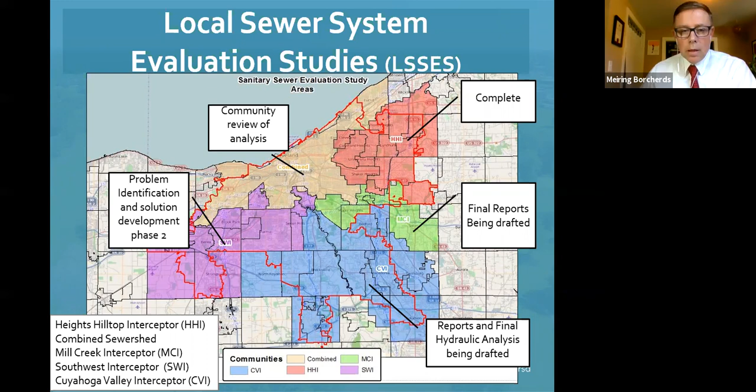Update for you on the 2021 fiscal year Member Community Infrastructure Program. Our funding was reduced, unfortunately, due to a loss of between $40 and $50 million in revenue during 2020 due to the pandemic. And as mentioned by Mr. Greenland, unfortunately, we had to reduce the amount of projects that we had. We had some great applications from all of you for the 2021 MCIP fiscal year. But unfortunately, we only had 2.5 million available to us. We selected 7 projects out of all the projects that we received to be funded for 2021. 3 of them were design and construction projects, and 4 of them were design-only projects. Next.

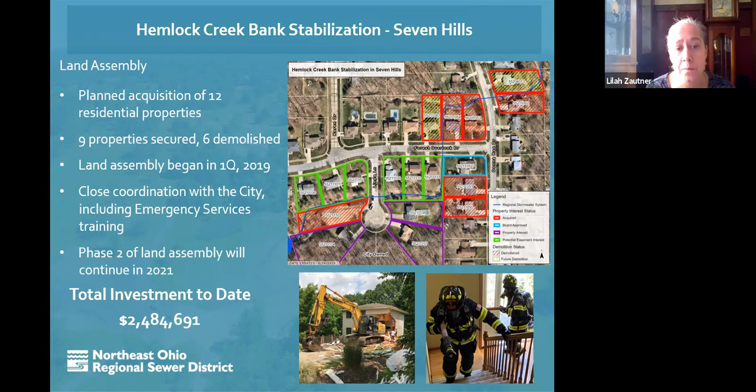With these acquisitions complete, we are now done with phase 1 of our assembly. We're now planning to begin design on phase 1, and while that moves forward, we will then start phase 2 of the land acquisition. The total investment to date in this Seven Hills project area is $2.4 million. And when we are finished, give or take, we'll probably be around $3.1 million. Thank you, John.

Next, I'll go ahead and introduce my colleague, Paul Kovalcik. Thanks, Lilah. Thanks, John. Oh, we could stay on the first slide, but we can go to this one. That's fine.

In the past, we've often used stormwater funds to help leverage state and federal grant money for projects that benefit the regional stormwater system. Specifically, we've made it a practice to provide match funding for grant projects. This includes, but is not limited to, 319, Sustain Our Great Lakes funding, Clean Ohio funding, coastal management grants, and the like. For 2021 and beyond, we've decided to formalize the process for distributing matching money for grants. So we've designated $500,000 in matching stormwater funds available for grant funded projects in 2021.

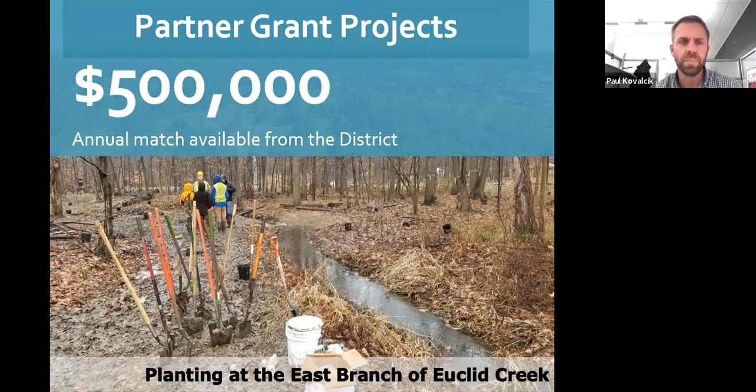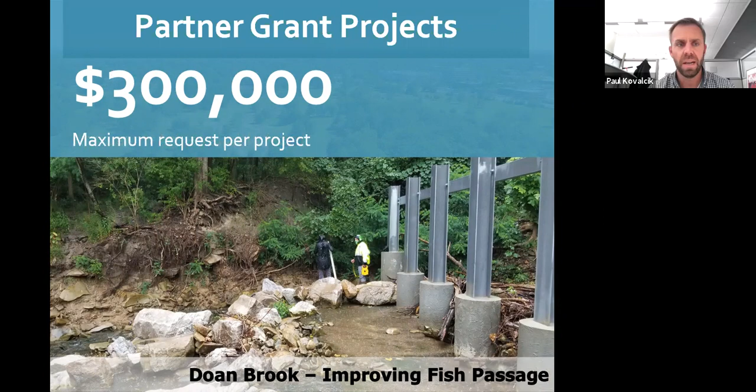Next slide, please. If you are requesting match funding from the district, we'd like people to limit their request to $300,000 per project. Next slide. The application process is relatively simple. We'd like to see a good project summary with anticipated outcomes, a cost estimate with some line items and unit costs with the total cost, a concept graphic showing the work area, hopefully along the regional stormwater system, and the dollar amount you're requesting from the district.

You can use the project summary sheet from an existing 9-element plan for non-point source implementation strategies as a template if you wish, if you have one. We'd like to see a little more detail if this is for 319 funding. And this is actually required if you're going after 319 funding. And then email it to me. Next slide. Email it to me by the end of 2020 is what we'd like to see from you. And our goal is to review these and let you know of our decision by mid-February 2021.

Next slide, please. I'll read this one. We'll nominate each application to our stormwater construction plan and rank them in our normal ranking system. And of course, the funding would be distributed according to rank.

We can be available to assist with developing concepts, sediment and nutrient budget estimates, costs, and other things for general technical support. But this does not give you any more chance of being awarded, I should say, or does not guarantee an award from the district. We can provide in-kind services even if the district funds are not awarded for the grant.

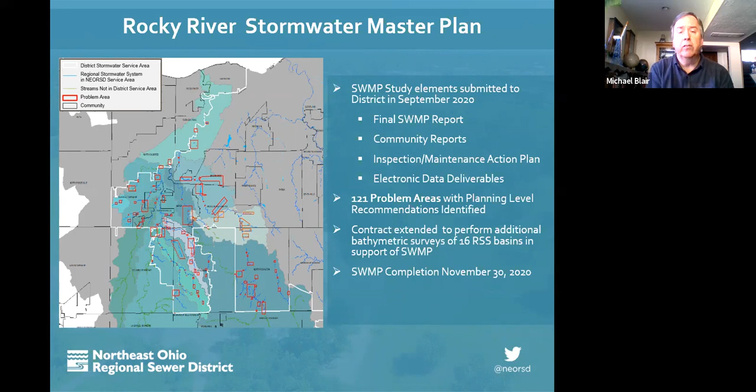If we go to the next slide, please. And what I wanted to briefly show you is the distribution in one way of the problem areas that we've seen, and problem areas as opposed to standalone projects.

Problem areas are where we have a great number of building, transportation, utility assets that are impacted by either flooding, erosion or water quality problems, as opposed to standalone projects where you may essentially just have one BTU that's affected. So we kind of broke it up into that area.

Unfortunately, this is not essentially all the work that we're going to take on alone. We are going to be working with our community members to try and whittle this down because we cannot do all this on our own, so to speak. If we go to the next slide.

So now that we've gotten all the project areas identified, we have preferred alternatives identified for each one of those as well. What we're doing right now is taking those stormwater master plan recommendations along with other projects that have been identified by either a member community or a watershed group, and right now we're going through the nomination process. So we've actually taken all the Rocky River problem areas and standalone project areas, and those recommended solutions are going through the nomination process right now. We're currently working on validating those.

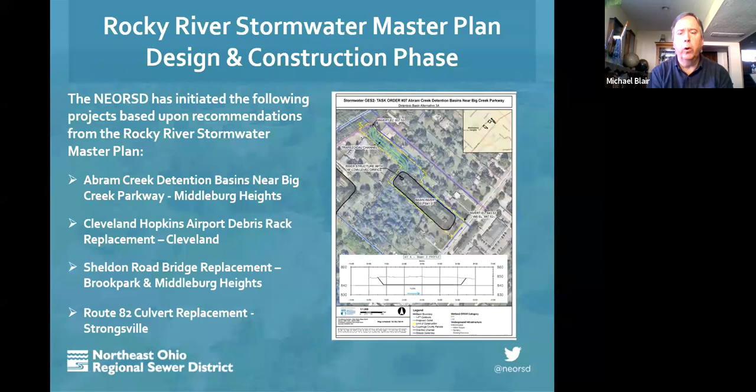Finally, we are working with the city of Strongsville. They're taking the lead on replacing the culvert underneath Route 82, or Royalton Road. That's in design at this point. If we can go to the next slide, please.

Now, as we go through the nomination process, some of these projects, when we take a look at them, might need some additional advanced planning. So this year we did award an advanced planning contract to an outside firm.

And basically this planning is to help support the implementation of the construction plan, with the goal of getting some of these really large projects ready for full design. So the projects that we might be talking about here are projects that we've identified in the master plan that have some very complex components. That could be a larger number of either property acquisitions or easements we might need to get for particular projects. The project might be located in an area where we have a lot of different stakeholders.

Let's say, for example, we have stakeholders like the city of Middleburg Heights and also the Cleveland Metro Parks. So we have multiple communities and then the Metro Parks. And this is just coordinating how we would work with the community groups, see and talk to them about what their stakeholder plans are for the area, so that we make sure that we do this in cooperation with those groups to see that this is a successful design and construction project.

There are also going to be certain projects that are just going to be cost prohibitive without doing phasing. I'm going to show you one in Parma where we have this particular issue. And then there are going to be some that just require some additional information to understand the full impact of this project on the regional stormwater system.

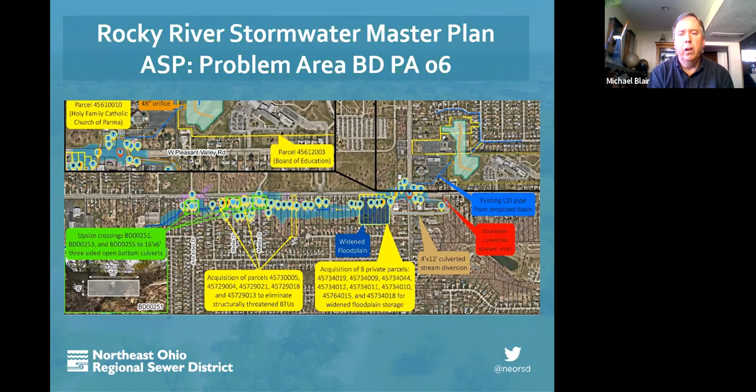Our objective is to accept the recommended alternative for this particular problem area. We want to confirm that the properties we've identified for either easements or acquisitions, for the widening of the floodplain or for the installation of that basin, are actually going to be available and usable for that purpose. We'll also review and consider the level of service goals to see how we can maximize the benefits versus the cost of this overall recommendation.

Specifically, we want to try to break down this overall preferred alternative into manageable projects that we can then take through the prioritization process and get through to design and construction.

I've mentioned early on that we received all the study materials from the consultant for the Stormwater Master Plan for the Rocky River. A lot of this information is available to you as community members. For example, most of you have access to our GIS system, and as part of that, if you click on the reference polygons, you can pull up all the CCTV video and PACP reports for the culverted stream sections within the Rocky River Watershed.

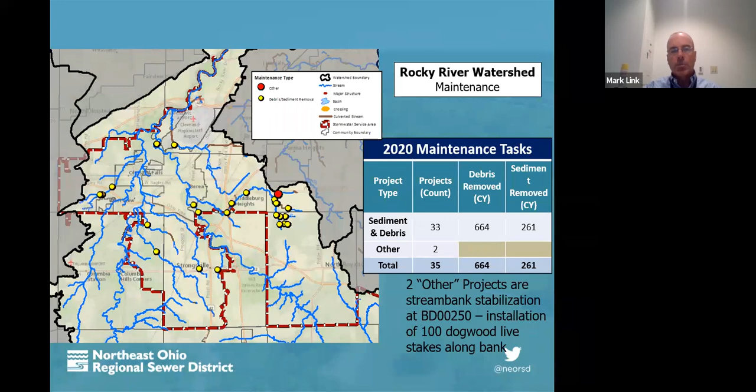So far in 2020, we've performed 33 sediment and debris removal tasks within the Rocky River, removing approximately 664 cubic yards of woody debris and approximately 261 cubic yards of sediment. We also performed 2 other projects focused on minor repairs to a bank stabilization project we had done. We compared our 2019 maintenance tasks with our 2020 tasks across the service area, and found that we completed more tasks in 2020, but the removal of debris and sediment was actually less.

I'll touch on one of our small scale maintenance projects. This was a problem we identified on Echo Lake Basin in Strongsville. We started noticing a large sinkhole forming due to some section loss on the concrete apron wing wall. The project entailed repairing that section loss with a concrete blocker. We backfilled that sinkhole, and lowered the basin water level to relieve pressure on that impounding structure — this dam is pretty old and in pretty bad shape. The basin dewatering followed some stormwater master plan recommendations, as this basin was determined to provide little to no detention or water quality benefits based on their model.

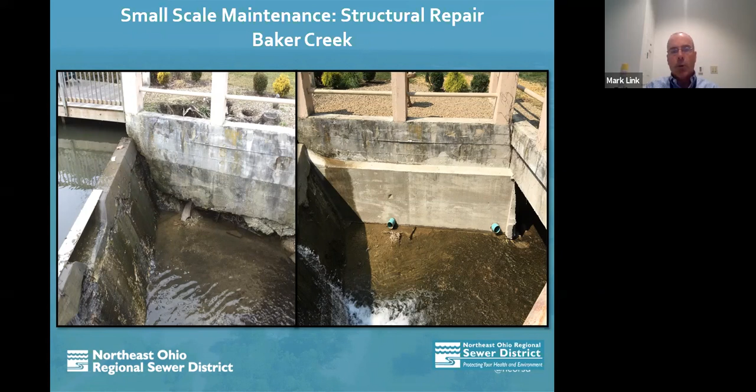So I'll move into our culverted stream inspections. In 2020, we began to increase our focus on these culverted streams, using data sent to us from the stormwater master plan teams. Our approach has been to review all the CCTV videos and the PACP reports, and then follow up with our own inspections of the most critical issues identified by the stormwater master plan teams.

Service area wide, we've completed about 68 out of the 113 culverted streams that needed follow-ups. Within Rocky River, our inspection teams have completed 6 of the 23 assets that needed follow-up. We'll continue to monitor these identified problems and make recommendations for any necessary repairs.

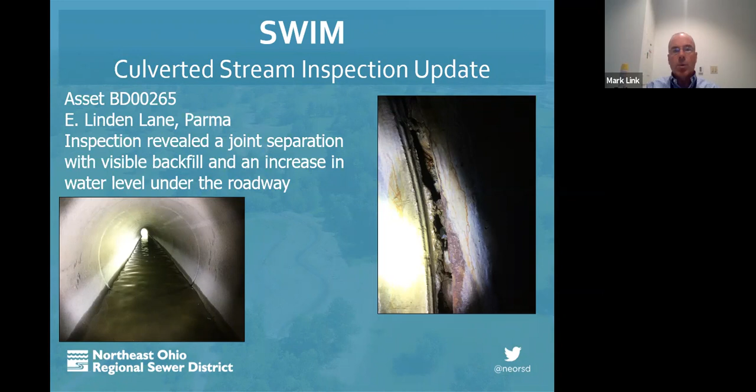So an example of one we re-inspected under East Linden Lane in Parma. We identified some joint separation and some visible backfill within the pipe itself.

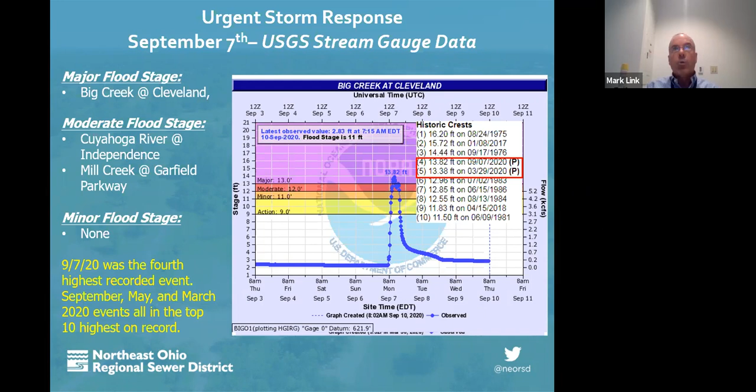This slide shows the results of our stream gauges that we monitor. As you can see, the Labor Day event was the 4th highest recorded for Big Creek — in 2020 we actually had 3 events on Big Creek that were in the top 10. One thing to note is that the Cleveland Metroparks Zoo will start to flood when the stage reaches 12 feet, and we did follow up with the zoo, and they confirmed they flooded during this event.

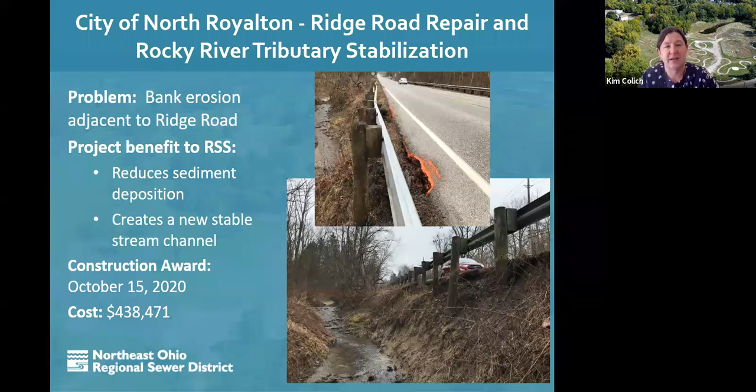So we're not just moving the channel, but we're incorporating natural features in this stream channel by incorporating the use of logs and woody debris along some of the outside banks, as well as opening up that floodplain to allow that water to slow down, to reduce the erosion potential, and just have a better functioning stream in this area. So we're really excited to get this project underway.

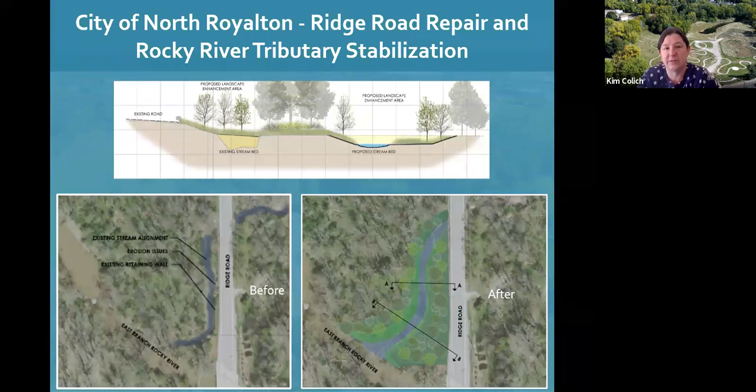Another project that's going through design right now in the city of Broadview Heights is our Chippewa Creek project near Broadview Road. This is one of those projects kind of like that Pepper Luce Creek one where we have an open section of channel that has some issues going on. The erosion, there's an undersized culvert on the upstream end of this. There are gabion baskets that are starting to come apart on one of the stream banks. We have a sanitary sewer that's close to being exposed, again, because of that erosion along this stream stretch. So those are the things we're going to be looking at, including expanding the floodplain as well.

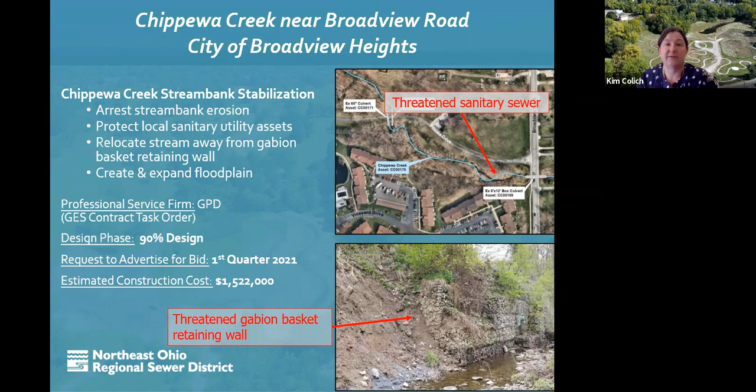Another design that's under our GES contract, getting near 90% design for this project, and we're hoping to bid this one out the first quarter of next year. Again, those opportunities for those open sections of stream to really establish a more natural stream function and health, reduce the risks to nearby infrastructure and assets, and create that floodplain to slow down the flows.

And then here's an example of a project that really did come out of our master plans. This one was the Cuyahoga River North Master Plan, but it's true of any of the master plan recommendations for areas that have a lot of flooding. So this is in a section of Big Creek in the city of Parma. We are starting a GES design task order to look at optimization of this existing upper Ridgewood Basin within the Big Creek watershed. And really, like I said, this recommendation is coming from our master plan.

We're really looking at how do we optimize the storage here to reduce flood risk downstream. It's a city-owned parcel. It's an existing basin, so it gives us a great opportunity to see how we can modify that basin to give us the best bang for our buck from a flood storage perspective. So we're just finishing negotiation on the scope and fee on this project. It says 2021, but we should be starting potentially next month on the design for this basin modification.

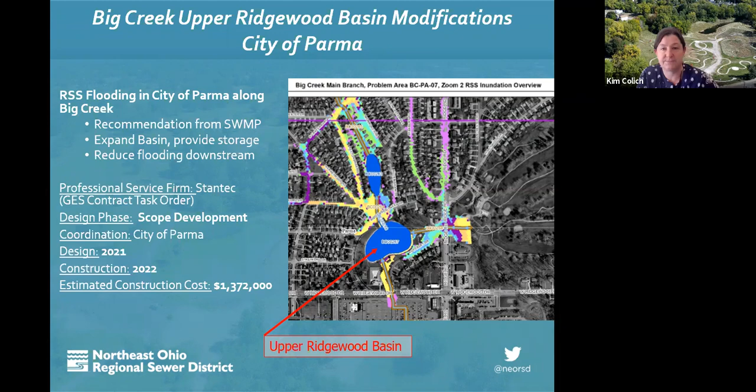And then moving over to construction, this is the West Creek Bank Stabilization by Sandpiper Drive in the city of Parma. We talk a lot about opening up floodplain and reestablishing natural features of these streams, but sometimes it's just not possible in a lot of these highly urbanized areas. So in this case, we had to harden this bank that was undergoing a lot of pretty bad erosion, and so we went ahead and installed a wall. The wall is now complete, and we're working at backfill and restoration of this project, and it should be wrapping up hopefully by the end of the year.

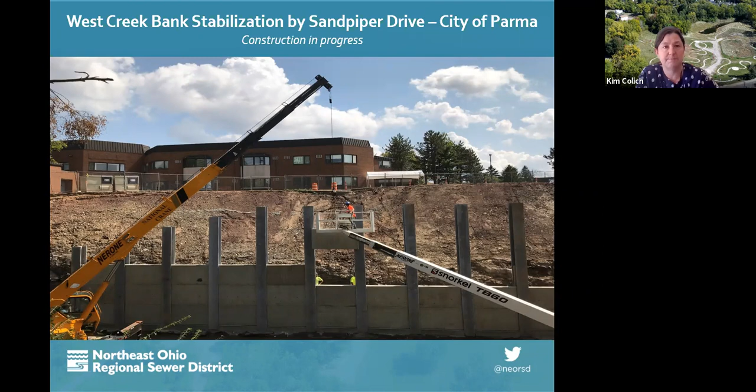And then another type of project. This one is looking at removing debris that is in the Doan Brook culvert in the city of Cleveland near Euclid Avenue. The Stormwater Master Plan looked at this area. We knew the debris was there. We've been tracking it. But when the master plan finished their modeling of Doan Brook, and we realized what a hydraulic restriction that debris in that culvert was having on the system, we went ahead and pushed forward with a contract to remove that debris.

And we're looking at about 700 cubic yards of debris that's going to be removed from that culvert, and that will really help the conveyance of the stormwater through the system and hopefully reduce flooding or flooding potential in this area by allowing the water to be conveyed through the culvert.

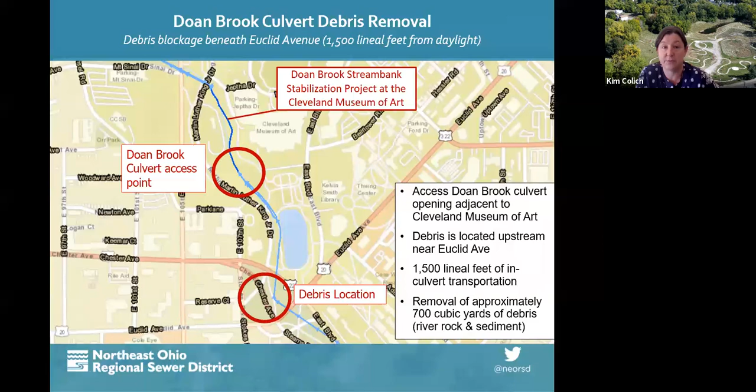And so we're also looking at different locations to put in access shafts along this culvert so that in the future, the removal of this material will be easier and more cost effective. So we're moving forward with that long-term solution as well.

So this was a project that we were able to get complete, get the stream back to a more natural pattern and location, which was where that existing home was, and reestablish a lot of floodplain through this stretch of stream. So we're really proud of this project as well.